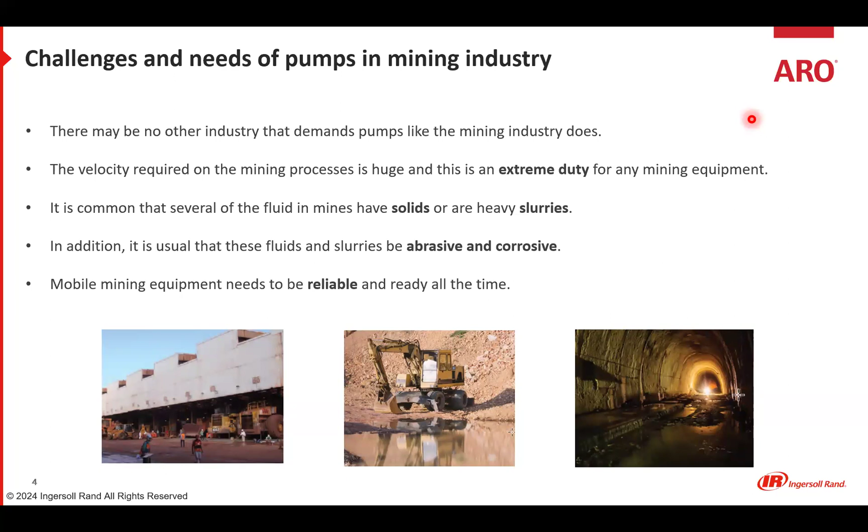So having that in mind, we are going to see what ARO can do for the applications where ARO can be applied. Using ARO with your mining demands is a smart choice. Okay, what does ARO offer for the mining industry? The first thing that you must have in mind is that our pumps are robust and reliable. They answer the challenge of how demanding the duty is, and the pumps will be reliable when they are needed.

ARO pneumatic diaphragm pumps and EVO series pumps offer a really broad range of material configurations that are able to pump low and medium viscosity. And when we're talking about low and medium viscosity, we are talking about almost 50,000 centipoises, more or less, depending on the length of the discharge or the diameter of the pipe. It may vary between 30,000 and 50,000 centipoises. But also our AODs, as we call the diaphragm pumps, can move suspended solids, whether they are abrasive and/or corrosive. It will depend on the material configuration of the pumps.

Also, in our portfolio, we have the piston pumps. They are the best solutions for mining truck and equipment shops. They are ready to deliver the right lubrication rate for more demanding applications. That is also interesting. When we are talking about the truck shops, when they are changing the oils, the grease, the lubricants for the equipment, what is needed? The shortest time and the right rate of lubricant.

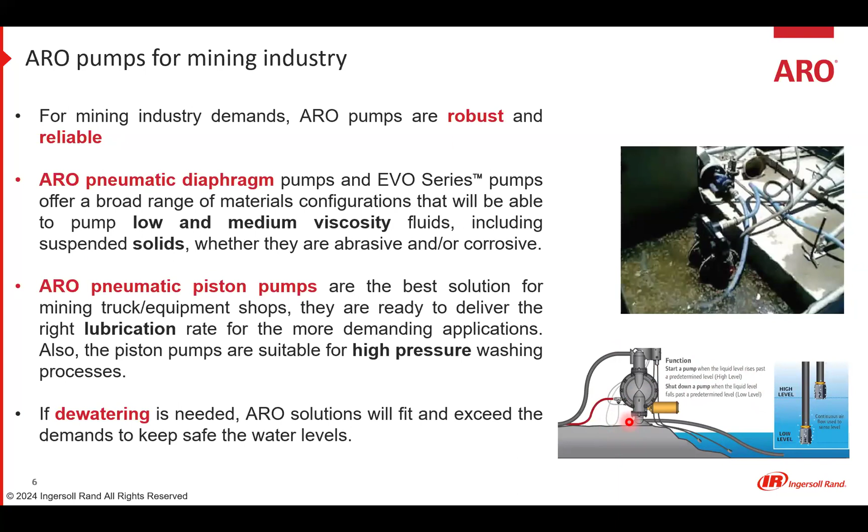And I guess, and it's my personal opinion, dewatering is one of the most demanding activities to be safe in mining activities. And we can see here, we selected some really interesting pictures and images of a pump just submerged into a slurry, pumping it out, or also the water system that we have available to be connected to different pumps of ours. So maybe it can be connected to our Pro series pump or EXP series pump.

What can our AOD pumps do? They are mainly used and really suitable for transfer processes. Our diaphragm pumps can be metallic or non-metallic with different internal materials that can cover about 95% of the different fluids to be transferred in mining. There are not many fluids, and not usual fluids, that wouldn't be able to be transferred with ARO AOD pumps.

They can move highly corrosive fluids. They are portable. That's so interesting. And one of the most interesting things is that in any mine, you will always find compressed air. So you can make a dolly, put the AOD, the pneumatic diaphragm pump, over the dolly and move it everywhere you need it. They are able to move low abrasive fluids, and also depending on the size of the pump, our pumps can move suspended solids.

Which are the main applications for them? Chemical transfers and supply, wastewater treatment, maybe filling the filter presses. It's a possible application. Acid bath and mined products processing operations, or as already said, press filters, mine chemical duty, and high flow double diaphragm pumps that allow fluids to be received from the tanker vehicle for supplier and storage tanks.

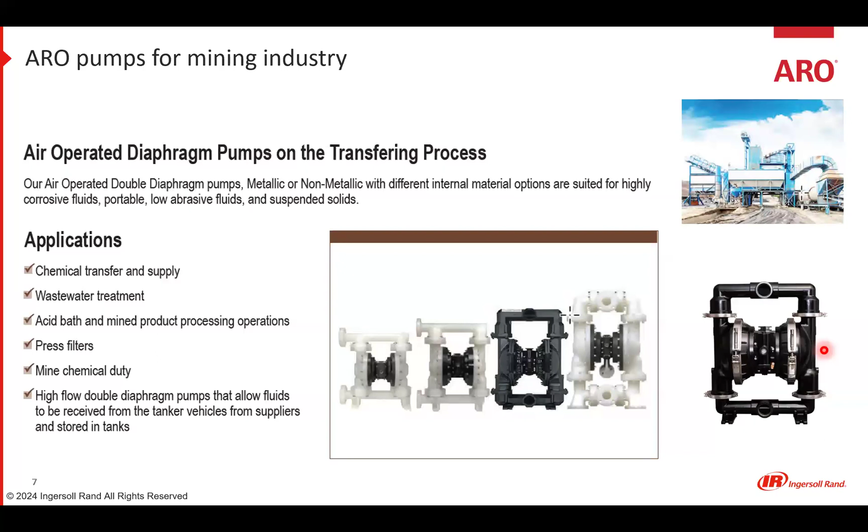Hey, Luis, you have really good experience with piston pumps. I want to highlight Luis. Before being involved in sales management, he used to be our specialist for piston pumps in Latin America. So I will let Luis talk about our piston pumps application in mining. Go ahead, please. Yeah, okay. Thank you, David.

Piston pumps are widely used for applications where higher pressures are needed. So we can use them with higher viscosity fluids. For example, grease. It's a very heavy fluid used in these truck shops. We use piston pumps mainly for truck shops in mining operations, so we can manage these heavy fluids. For example, grease to grease all the equipment in the shop that goes for maintenance.

Another application is for oil, heavy oil, all kinds of oil, motor oil, transmission, all the fluids. Normally, these fluids are outside the shop, I mean, long distances due to safety, to explosion and fire risk. So we have longer distances than normal to run these fluids from the tanks to the shop so they can do the maintenance accordingly. So using a piston pump that can achieve higher pressures, we can transfer these fluids, oil or grease, to the maintenance shop and into the equipment itself.

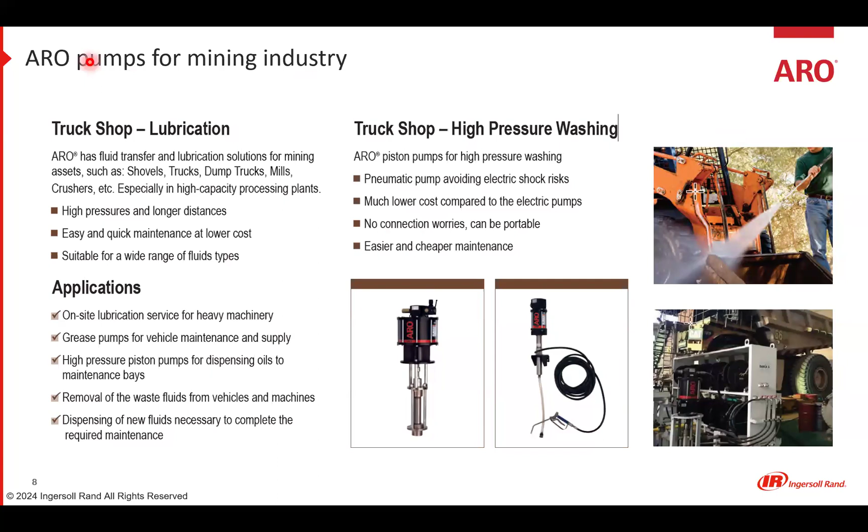Yeah, thank you, Luis. Okay, another application where we can use our ARO pumps is dewatering. As I said at the start of this webinar, in my opinion it is one of the most demanding applications for pumps. Of course, there are other technologies that can be used, but the most reliable, and the ones that can last longest with lower maintenance cost, are the ARO diaphragm pumps.

What we offer: high flow capacities up to a little bit more than 200 gallons per minute, or a little bit more than 800 liters per minute. They allow small solids to pass through the pumps. And one interesting thing is that common AODD pumps, pneumatic diaphragm pumps, can be used, but we have the Pit Boss, which are the ones you are seeing in these pictures. They have a mesh here that will limit the size of the solids that can pass through the pump, so you can be sure that there won't be any blockage, or any piece or solid that could stop the pump or stop the process.

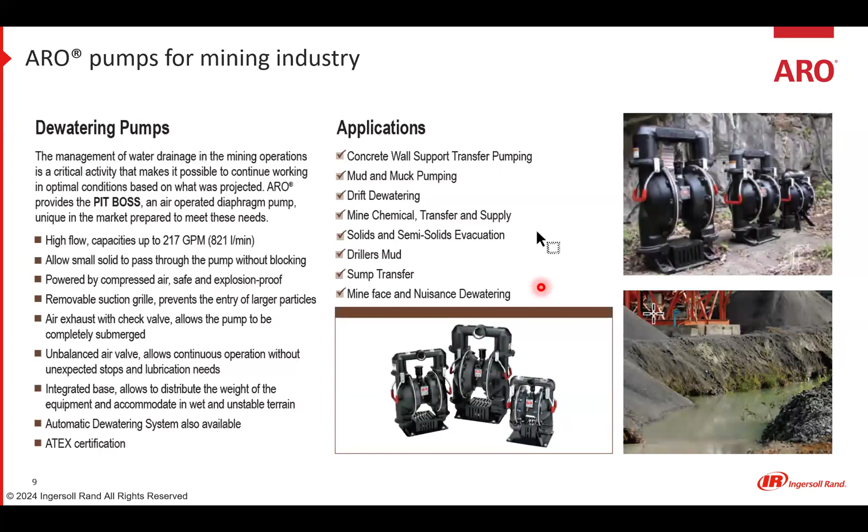Another kind of pump that we have, which is not common and not many people know about, is the centrifugal pneumatic pump. We have them for basically the same application, dewatering, but the advantage is that if the space where the mud, slurry or sewage is contained is small, we can 100% submerge the pump into the wells or the fluid container, and they will work really easily. We can achieve flows of almost 900 liters per minute, about 237 gallons per minute. The design is really simple and handles a wide variety of applications. That's it about our centrifugal pneumatic pumps.

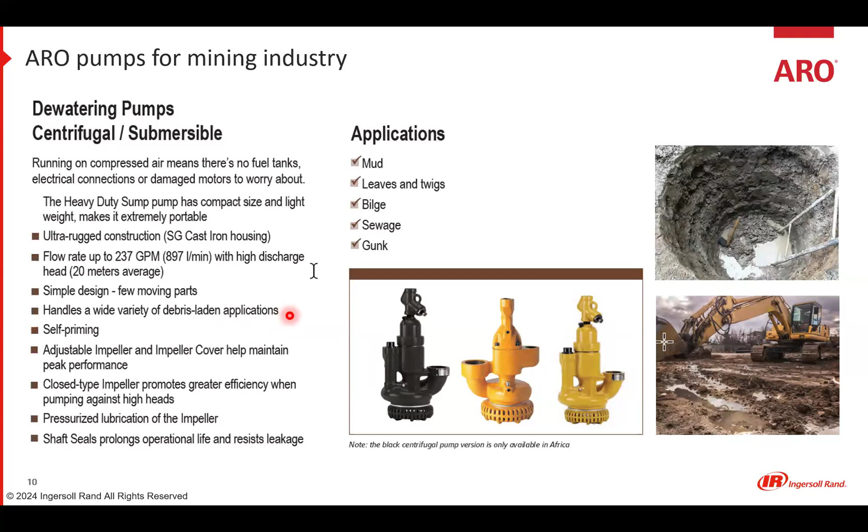In the remaining 10 minutes we will see some success stories that we have had around the globe. The first is a large company near Birmingham, Alabama, several years ago. The customer had some situations that were solved by our ARO pumps, in this case our Pro Series pump, a 2 inch aluminum Santoprene pump, for the mining dewatering application. Rainwater and slurry collect in low points throughout the area and are transferred by the 2 inch pump. That's it: just take the rainwater and the slurries and move them to a safe area. These advantages were the trigger for the customer deciding on the ARO pump.

The unbalanced air motor provides continuous service under varying conditions. The pump design allows for quick and economical rebuilds, runs continually through varying duty cycles, dry runs, submerged, etc., and the suction lift holds up in harsh environments.

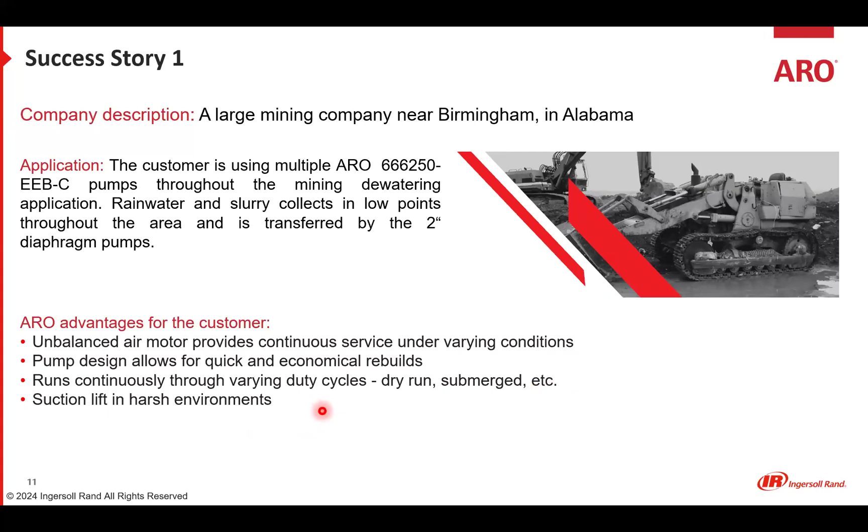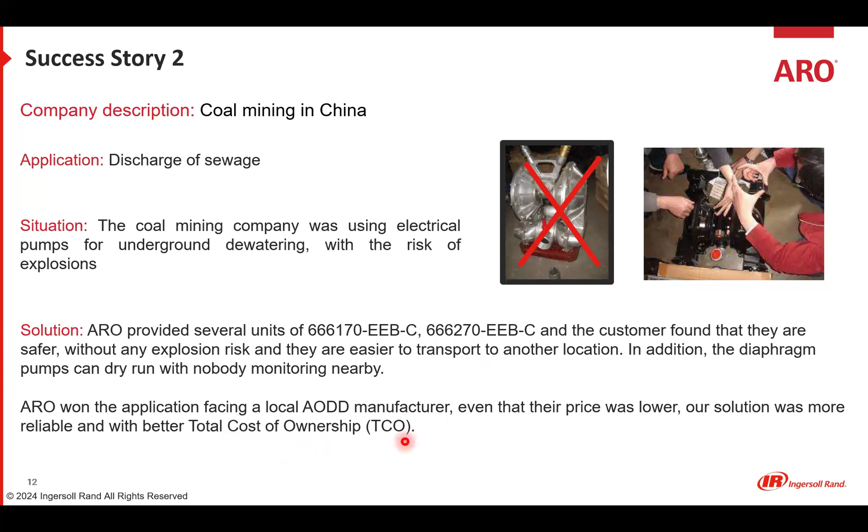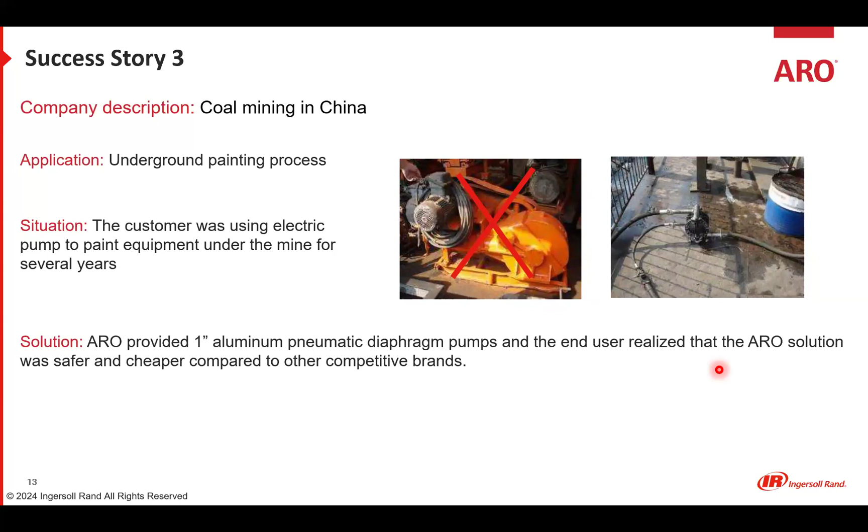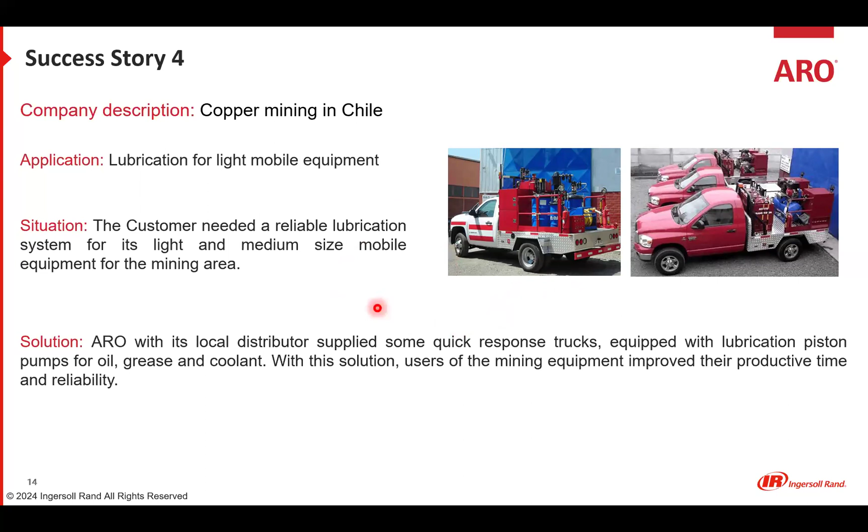And actually, when I was talking about the usage of equipment over 4,400 meters above sea level, this is one of the examples. Chile has really high mines in the mountains.

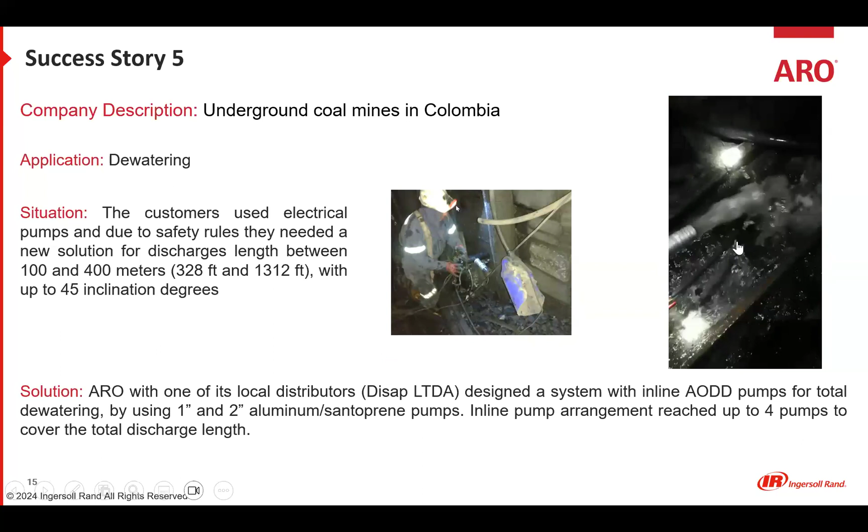The other one is so interesting, in Colombia, where I'm based, with Disap, one of our channel partners here. They designed a system with up to 4 pumps connected in series with no dewatering pools. The underground coal mines here in Colombia have really small tunnels, between 100 and 400 meters in length, with an inclination of up to 45 degrees. And they designed a series connection for dewatering the mine. Here you can see one of the tests they did during the design to see how the pump could solve the situation.

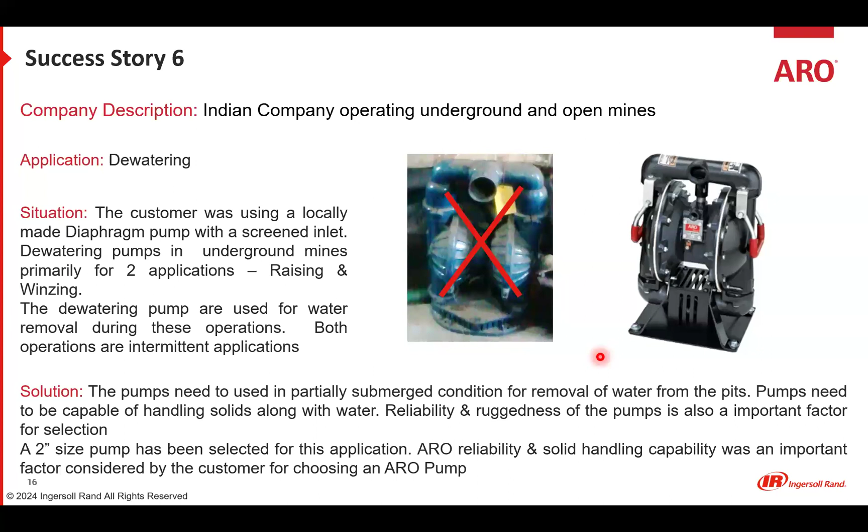There are about 14 mines that they may be operating. They replaced all the pumps with ARO pumps. Where it was needed, they chose Pit Boss, and where it was needed, they chose normal common pneumatic diaphragm pumps. So this is the information that we had for today.